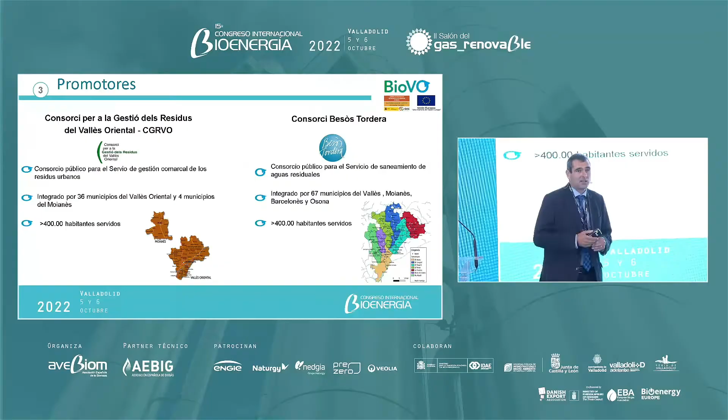So talking about the entities, I'm from one of them, the consortium. We do the wastewater treatment of many counties, 36 counties of the Vallès Oriental. This is the eastern part of Barcelona. Sorry, the west part. So not the coast of Barcelona, but the mountain, the inside part of Barcelona.

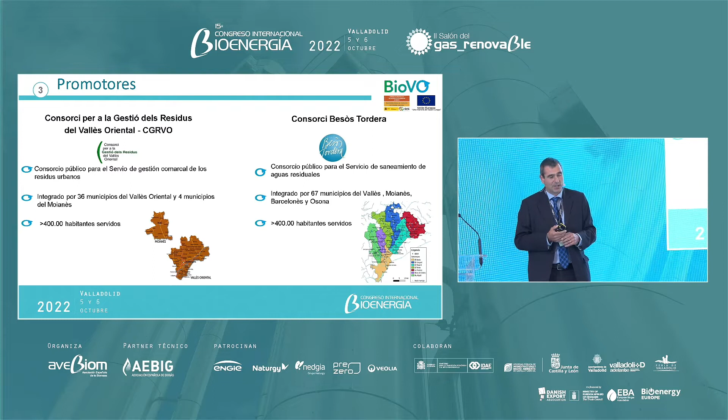So talking about this Vallès Oriental, my colleague also talked about this, we are in charge of collecting the solid waste and wastewater of these counties. And in both administrations, we take care of all the waste of more than 400,000 inhabitants. So as a consortium, and also from Besòs Tordera and Vallès Oriental, these two administrations, we collect all the solid waste and the wastewater.

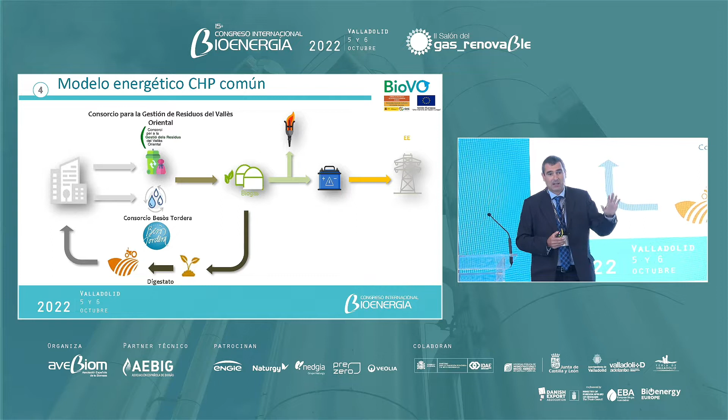And our model also takes care of the energy, and we also generate electricity. Both facilities have anaerobic digesters, as the previous speech was talking about, and here we produce biogas. We have been doing this since a long time ago in both facilities. We take advantage of that, because we receive all the waste from the agro-industrial sector, and we make compost on one side, and on the other side we use it for agriculture.

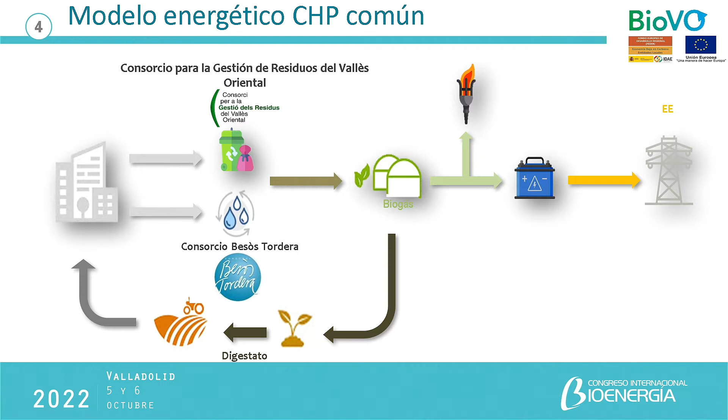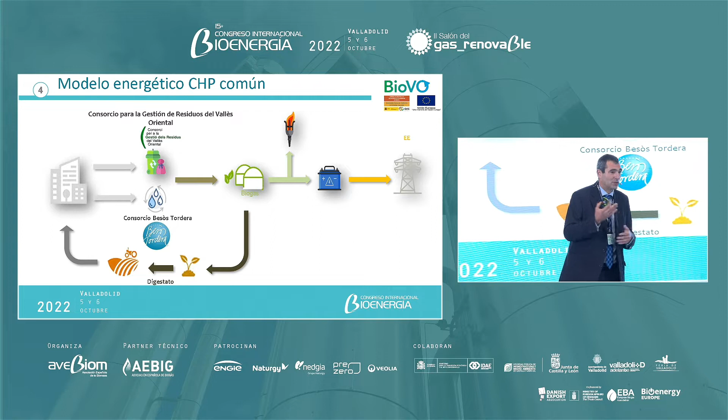We have two cogeneration engines in both facilities, and we produce energy and inject it to the electricity grid, and the heat generated we use to keep this anaerobic digestion going, since this is one of the handicaps we have compared to other energy sources. Also, we have torches that are giving us services. With that, of course, we have problems with the peaks of this generation.

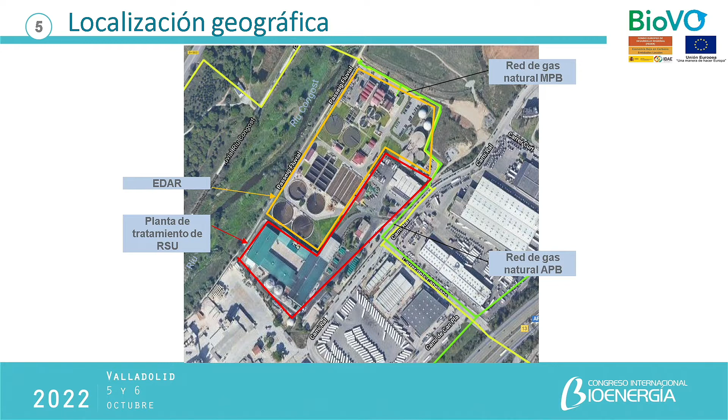Another coincidence is that we are in the same parcel. In the yellow line you can see the perimeter of the wastewater treatment plant, and the red line is the solid waste treatment plant. Also, within this space, as Nedgia was telling us, it's not that we have pipelines close to us, but these pipelines are crossing our land. So actually, we have 4 bar pipelines.

Therefore, we thought we could substitute these torches that both facilities have for direct injection of this surplus biogas to the grid. So we could turn this into biomethane. This made us think, only for the torch, these are the first numbers. This is logical, right? We don't want to burn the surplus. It is a pity to have the torches on, so we would prefer to use it in other ways.

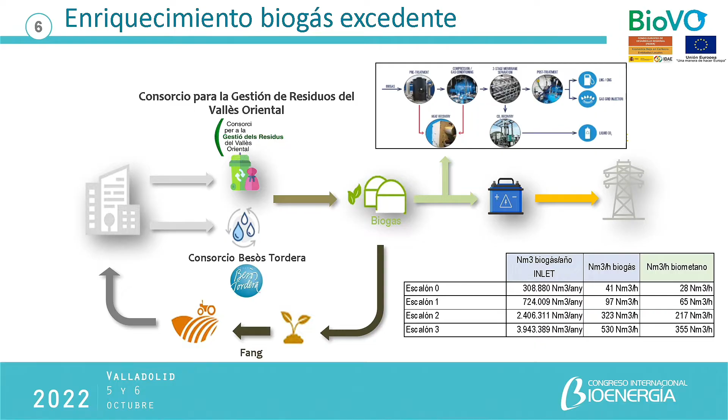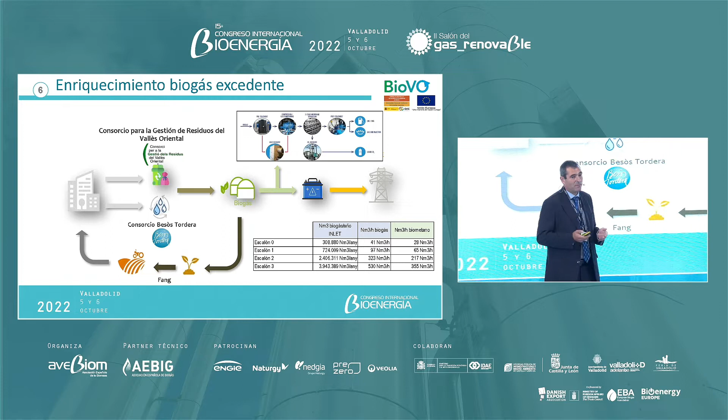So once we were doing numbers, we could see different kinds of scenarios. For example, in case the engines have to stop because of cleaning processes, or because of the market, or the demand changes. And we are talking about 2018, remember that. So thinking about future scenarios and the functioning, we were dimensioning this plant during this process.

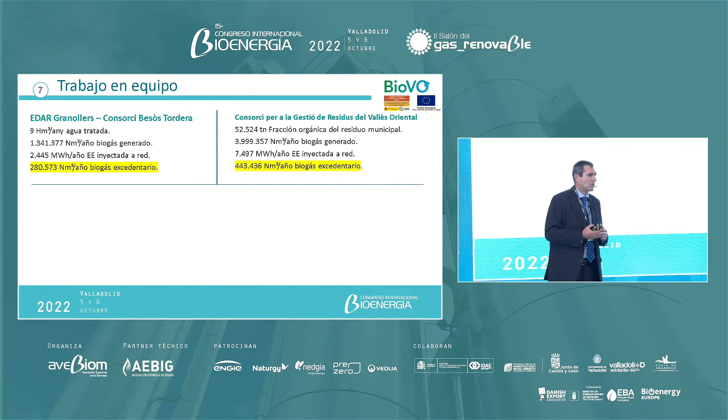So what's the baseline of this project? The surplus biogas. The proportions coming from the wastewater treatment plant and the solid waste all together produce 4 million normal cubic meters per year, and we inject much less megawatts compared to the consortium's other facilities. So this proportion is 1 to 3, right?

Since we started to work as a team, we thought about how we could do it. We were in 2018. The first thing we asked is whether this idea is a happy idea, or is it going to be the reality? So we created an agreement in order to make it profitable. Based on that, we did a review of all the existing technologies: PSA, scrubber, and membranes.

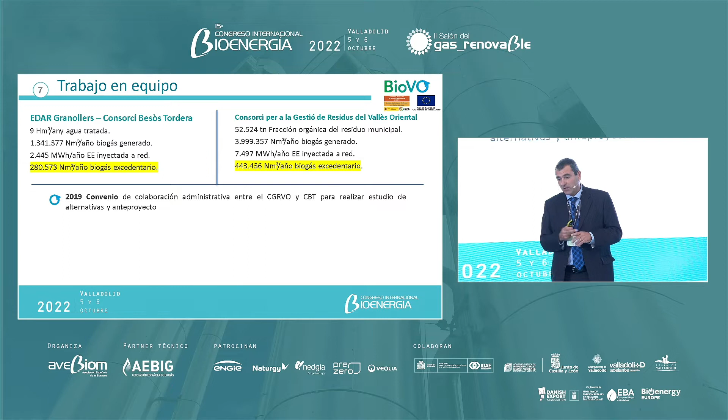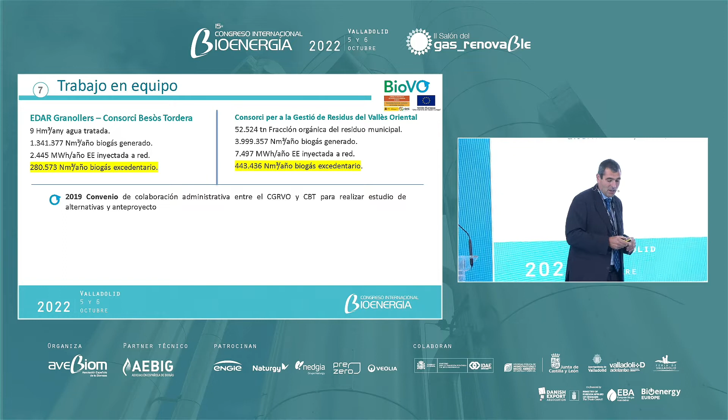And at the end, we concluded that the best option for this regularity and flexibility, for this kind of expansion project for the solid waste and wastewater treatment, you can see it in the posters, I invite you to take a look. We chose the membrane technology since we thought, okay, since we have this, let's think about the cost.

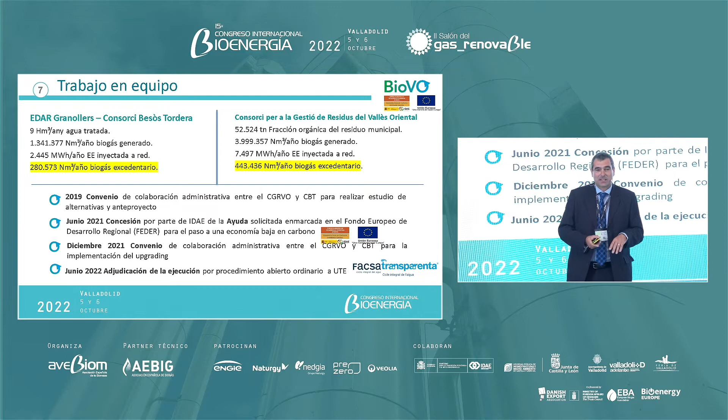And it was good because in June 2021 we received this help, and having such a huge subsidy, we signed an agreement between both organizations, and we started the project at that point. So after June 2022, we started with the building project and implementation and a year of operating of this plant. FACSA Transparenta was the one who won this call. And remember that in 2018 there was a stable market, but by June 2022 the market had changed a lot since, you know, what happened in 2020.

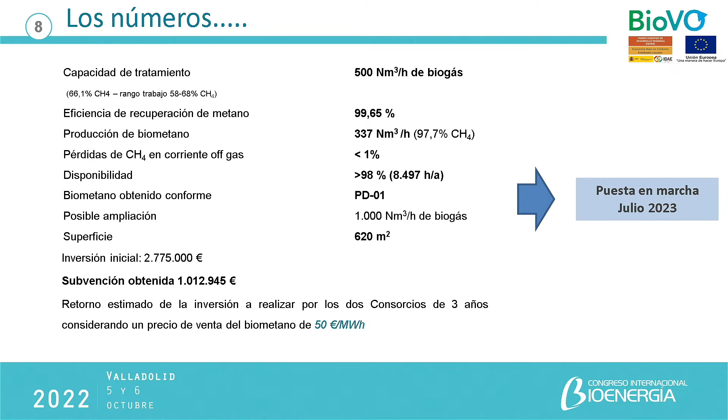What we are building is not functioning yet, but we hope that in July 2023 it is going to start working, because this is the timeline they gave us. This is a plant based on 500 normal cubic meters per hour of biogas. And this is a very compact plant. I'm going to show you some pictures. This is around 600 square meters of land, and it was given an initial investment of 2,775,000 euros.

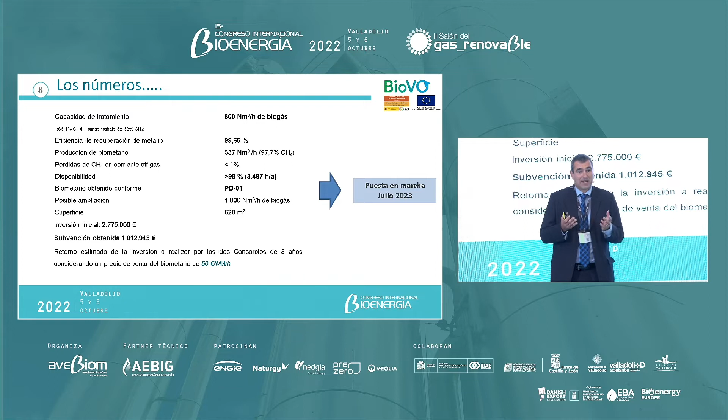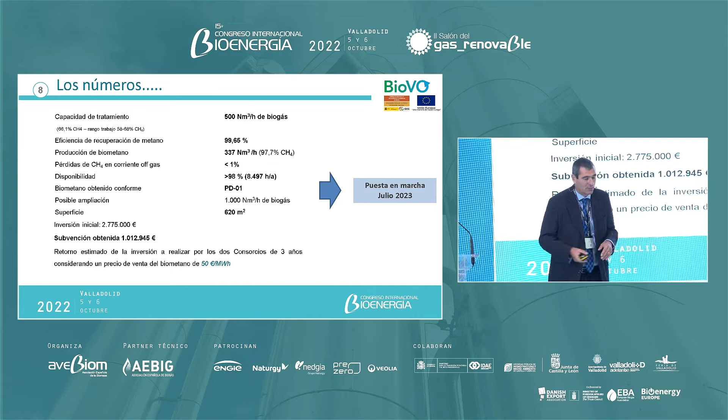The first initial numbers were telling us what the profit would be for both partners taking part. The return period was going to be a couple of years. So it was logical that it was going to happen at some point. So what was happening? Well, as Francisco Repollo was telling us, there was a storm in the market. What's this storm?

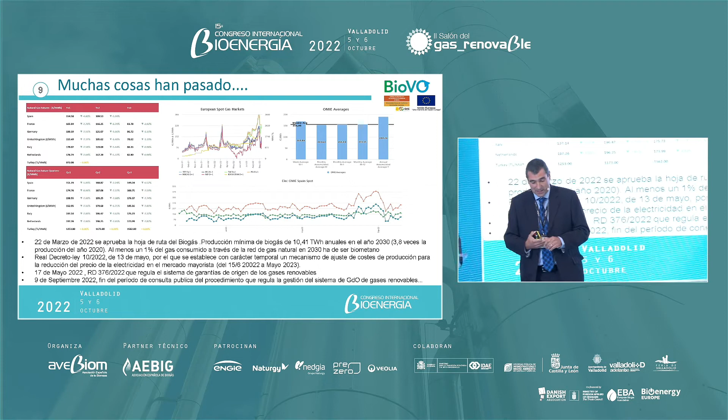There was also a legislative advance on biomethane, and it also appeared in the biogas roadmap, and we reviewed all the regulations. The electricity bill has also risen a lot, and it has an impact on our facilities and all the other energy facilities. The OMIE is over 156 per megawatt hour, and the gas prices are around 150 euros per megawatt hour.

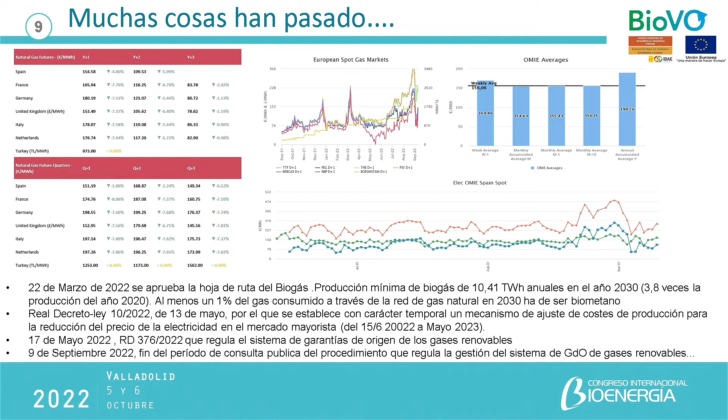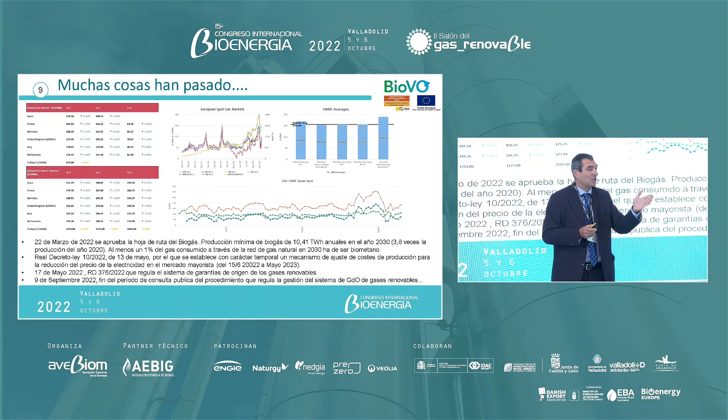So when we started this project, the initial data was 50 euros as the price of biomethane, and we had a margin of 6 euros, right? That was our profit. But nowadays, we have calculated to what extent we're going to press the button of injecting or not, because if the pool price is 150 euros per megawatt hour, the biomethane has to be 160 euros per megawatt hour, because otherwise I'm at the balance point, with no profit and no loss either.

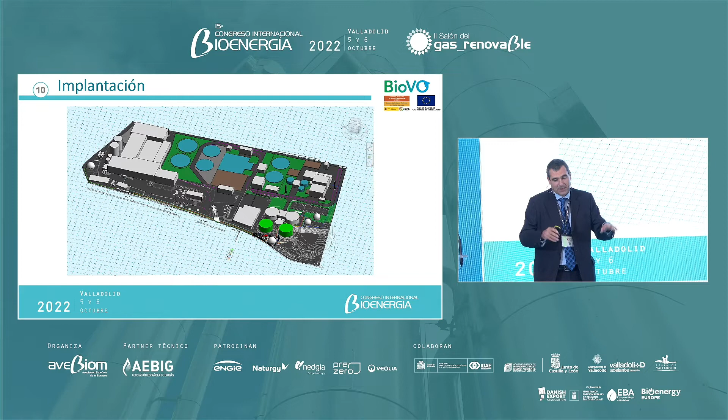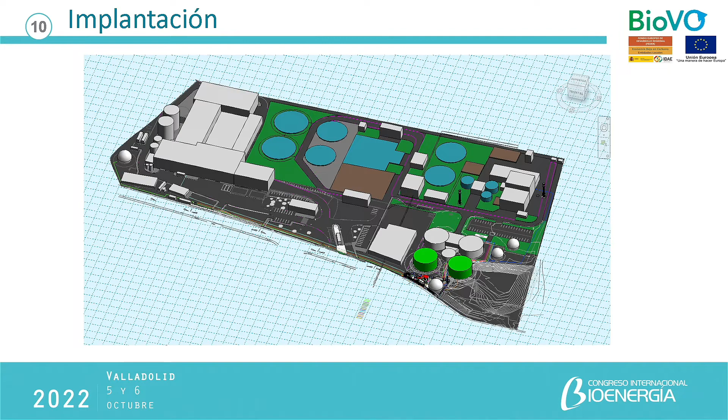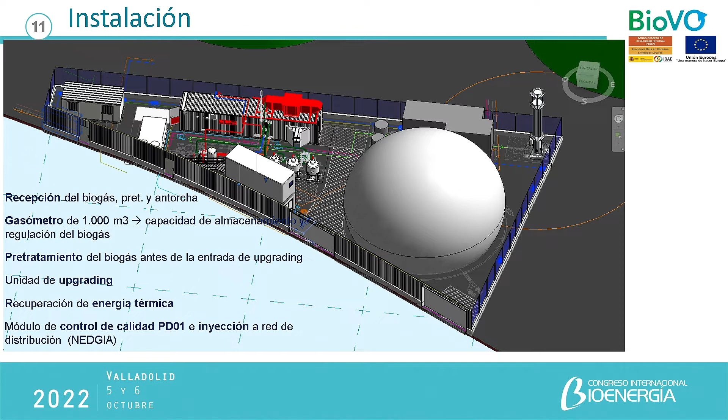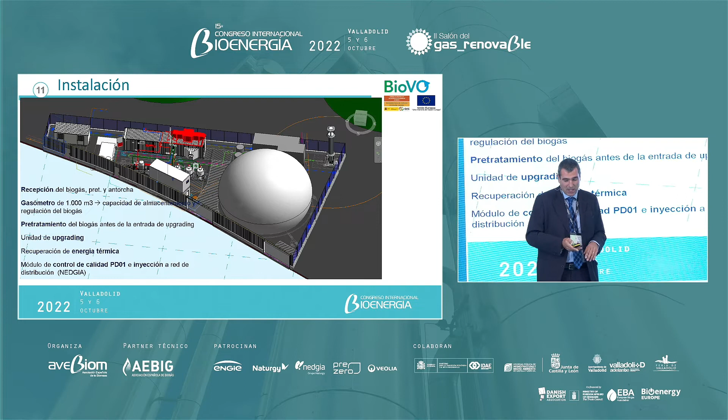Remember that both facilities have cogeneration engines, so we have to make them work together, because one complements the other. Because it's not a real project for now, you can see here both facilities, the wastewater plant and the solid waste plant. You can see the 600 square meters of the upgrading plant with the same structure as we were seeing, but with membranes: a gasholder, the membrane module and treatment with scrubbing and active charcoal, and thermal energy recovery for the cooling and compression of the biogas.

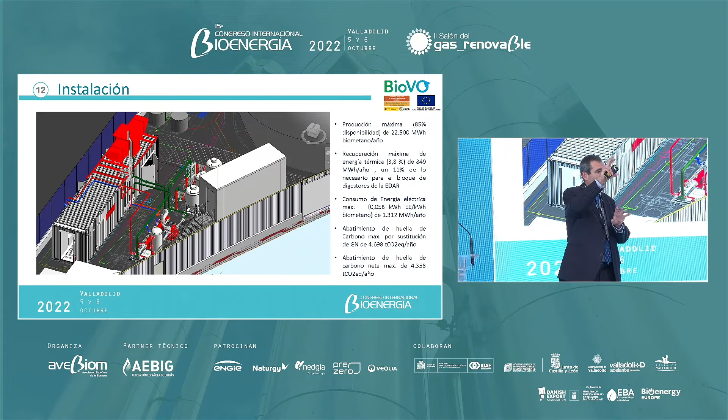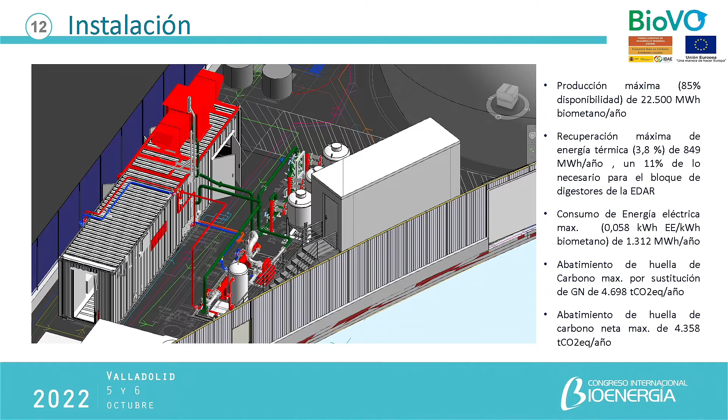And this is important because we actually need the heat for the anaerobic process in both treatment plants. Therefore, we need this energy for our own facility. These cogeneration engines need quite a big percentage of energy, but it just recovers around 4% of the energy. Therefore, it only gives us 11% of the energy to continue with the digestion. Therefore, we have to continue with this cogeneration, so we take advantage of the surplus heating.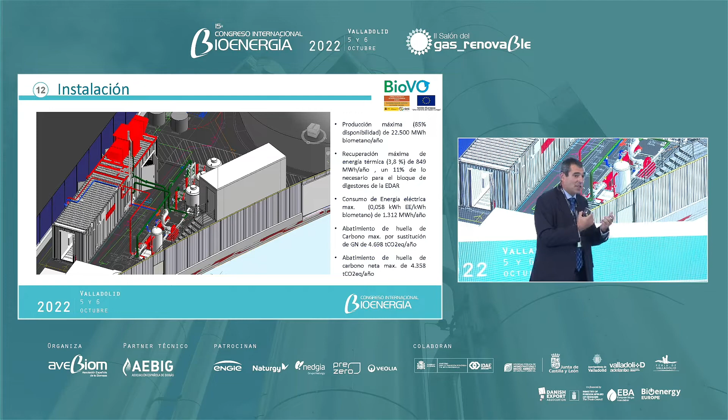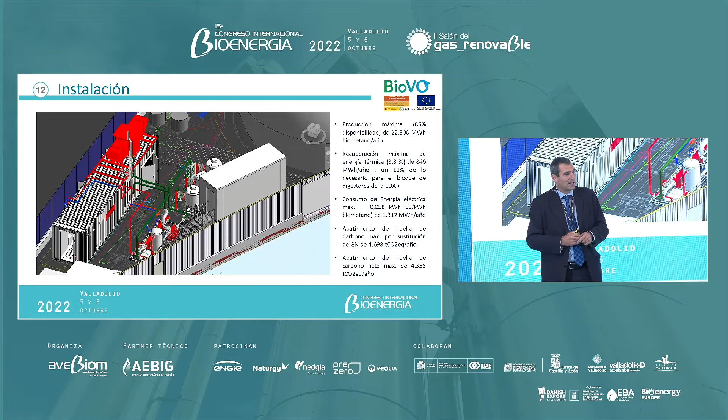So talking about GHG emissions, if we want to substitute the primary resources, for example the fossil fuels, we want to substitute them in order to avoid the GHG emissions. But considering that there is 4,300 of the carbon footprint.

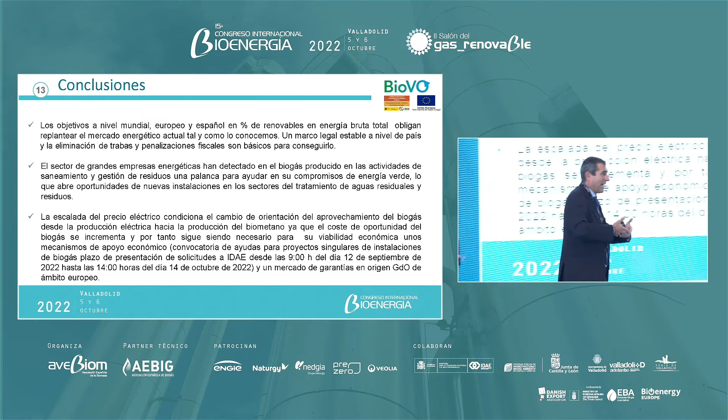What are the conclusions? We are repeating what our colleague was saying. We have to establish a framework, and we also have to talk about the guarantees of origin. The global goal brings us to biomethane as renewable gas injected into the grid. We were talking about the terawatts previously, and also about placing value in the energy market, remembering that biomethane has real potential among renewable energies, considering its monetization.

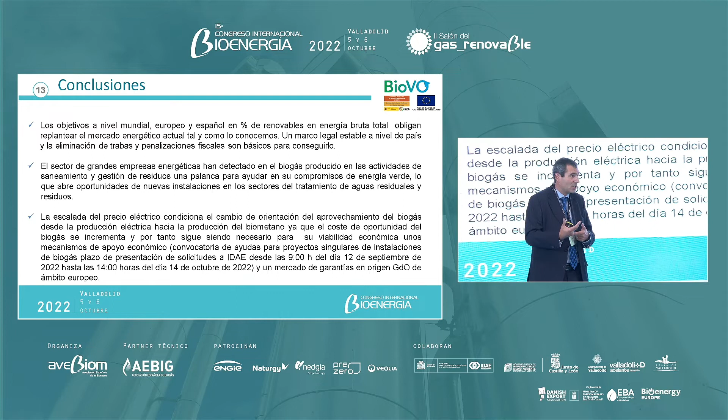Therefore, if we remember the numbers of this biomethane and the megawatts, we have to remember that maybe we will need some reinvestment in the future. So if you have any questions, please, you can ask me.